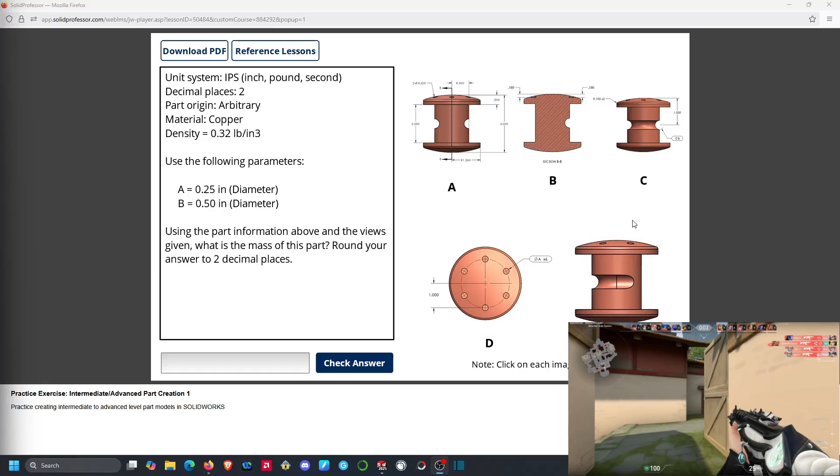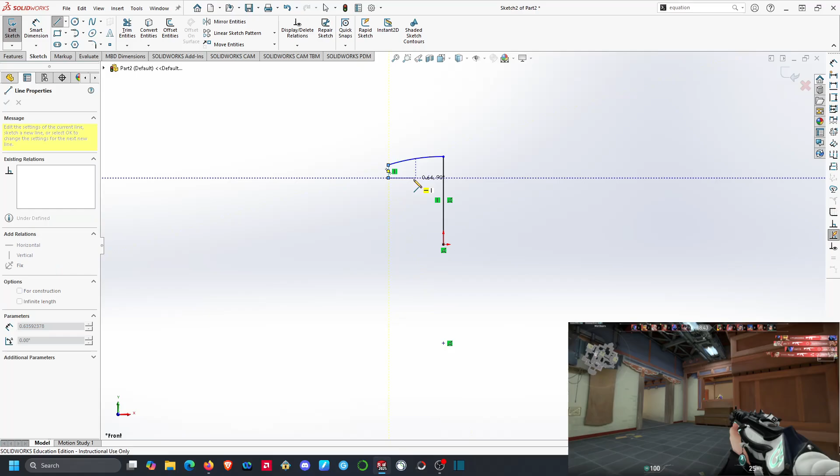Before you do anything, make sure you're in IPS units because that's what it requests, at least for mine. We're going to start by making a sketch, which I already have selected, and select our line tool. We'll make a vertical line, then a tangent arc like this, then a vertical line down, then a line like this, making sure it's horizontal with that. Then we'll make a center line right here, and start dimensioning.

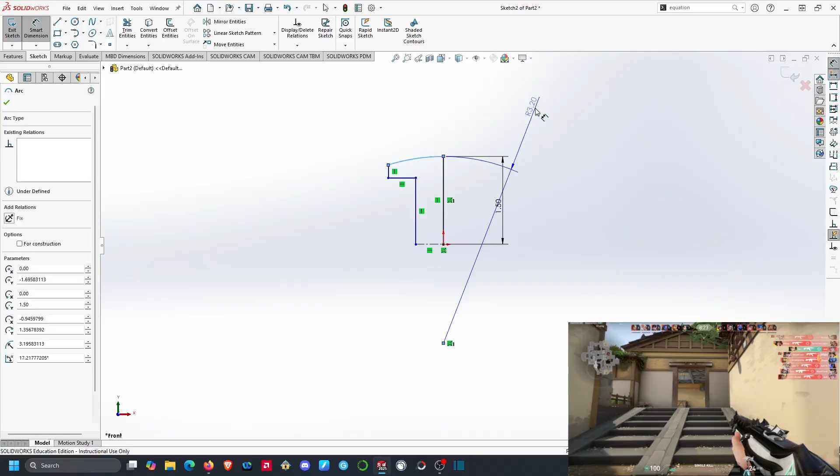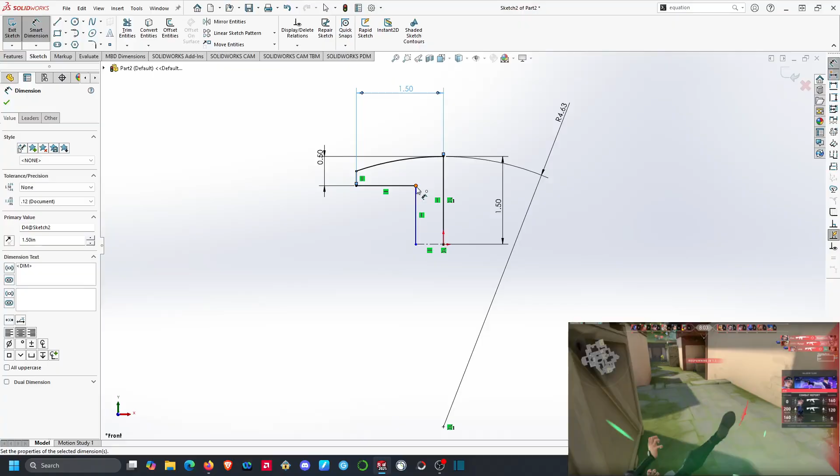This needs to be 1.5 inches long. Before we make a fillet, we're going to set this to 4.625 inches, and it'll make that. Then from this point to this point, this needs to be 0.5. From this point to this point, this needs to be 1.5. Then from this point to this point, this needs to be 0.9.

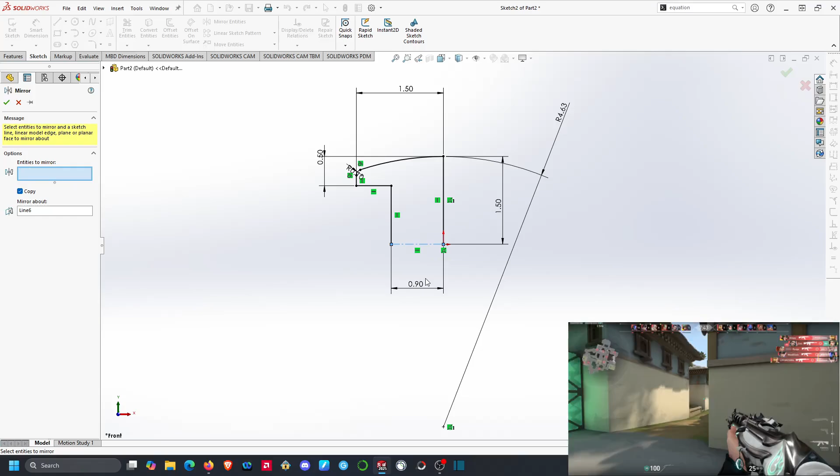And we'll add a fillet right here, making sure it's 0.1 inch. We have a defined sketch, but what we need to do is mirror it. We're going to mirror about this center line, so we'll hit Control+A on our keyboard to select everything, and mirror it. All right, and this is the sketch we have to work with right here.

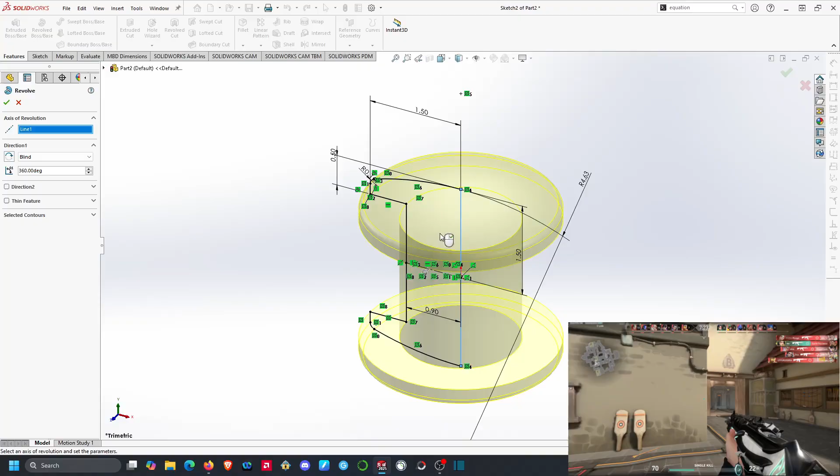What we do next is go to Features, and go to Revolved Boss/Base. We're going to revolve it around this line, and this is going to give us our shape, and we'll hit Yes.

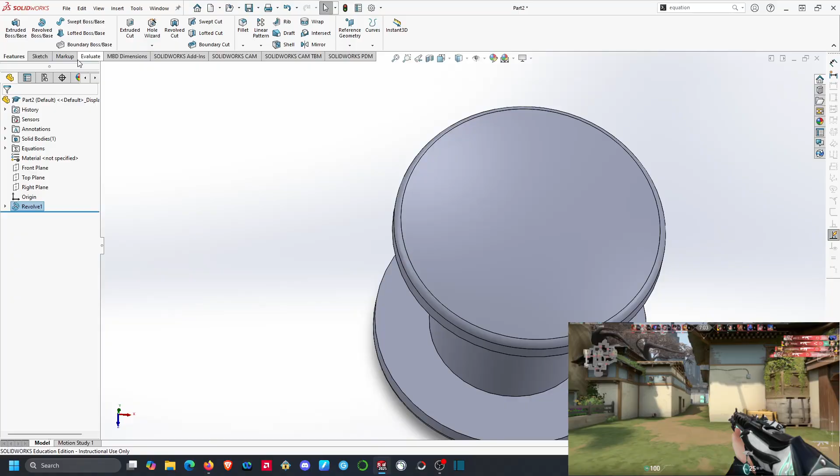Once we have our shape, we're going to go to the top. Before that, we want to make reference geometry - a plane on the top for our two references. We'll choose this top face here, face 1, and this face under here, face 2. That's going to make a plane, and then we can make a sketch on that plane.

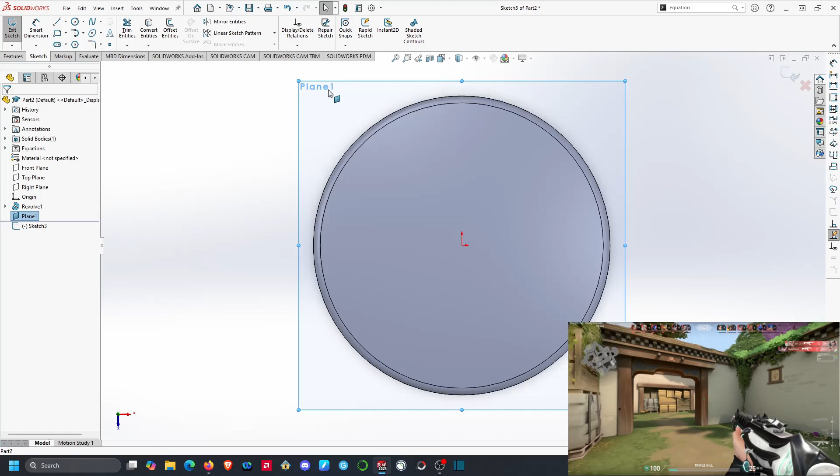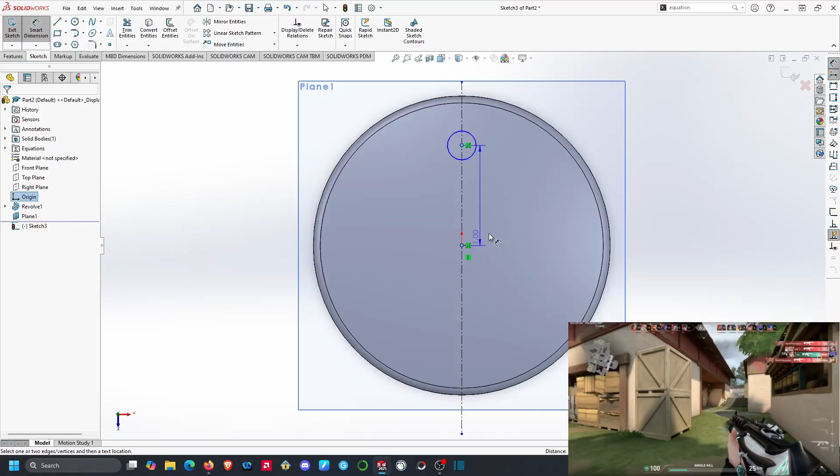For the sketch, we'll make a center line down the middle, and take a circle and put it right here. Using the Smart Dimension tool, from here to the origin this needs to be 1 inch, and the circle needs to have a diameter of 0.25, or that's our A value - let's do equals, yeah that's our A. So we choose our A, and you see this is fully defined.

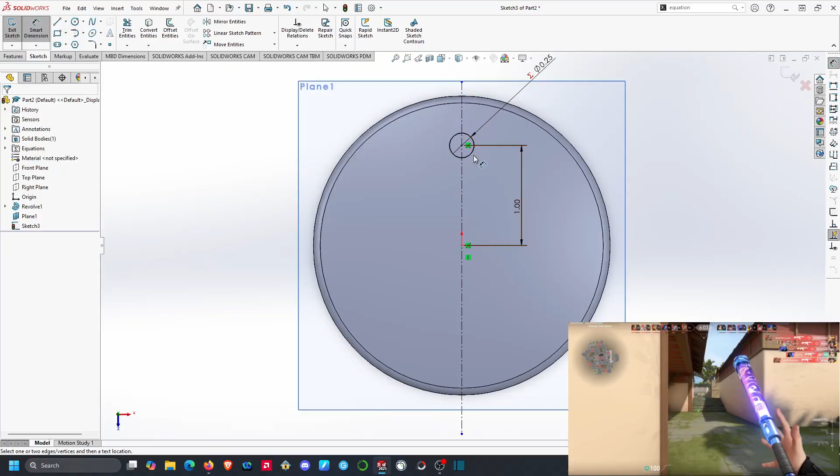To make the pattern, we go up here where it says linear sketch pattern, click the arrow, see circular sketch pattern, and click on this. See how it makes our circular sketch? We need 6 of the circles, so we'll hit 6 right here and fill that in. Click yes - this gives us our circular sketch.

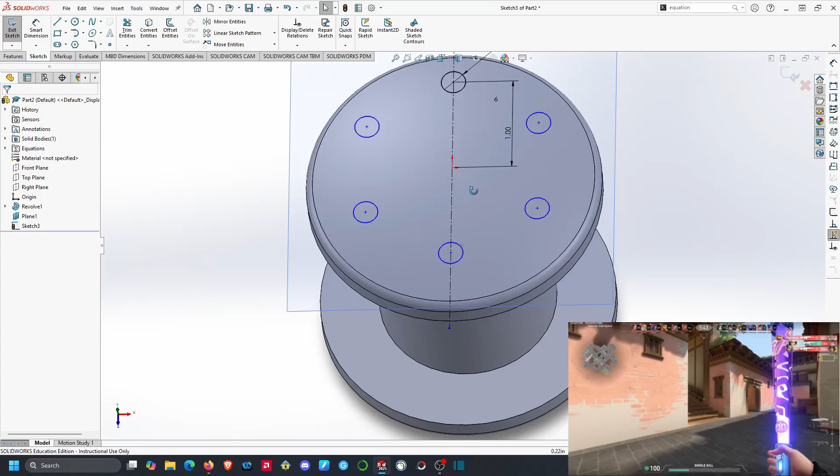Then we go Features, Extruded Cut. Click on this, and set it to 0.18 inches - that'll cut 0.18 inches down. Boom, look at that, perfect.

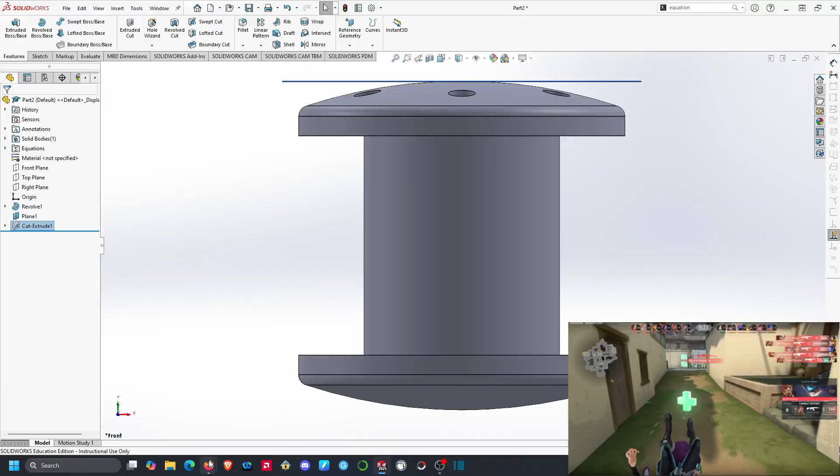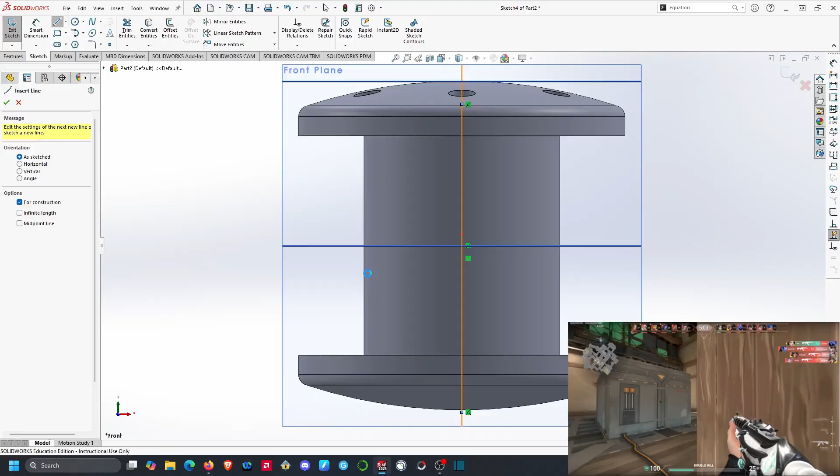Then we're going to create the little cut thing - if we look here, we're going to create this thing right there. So we go to the front plane, then sketch on the front plane. We need to get a center line, draw a center line down the right plane, then draw another center line down here, just to help me out - you really don't need this. Then we're going to put a circle where the midpoint is on that line.

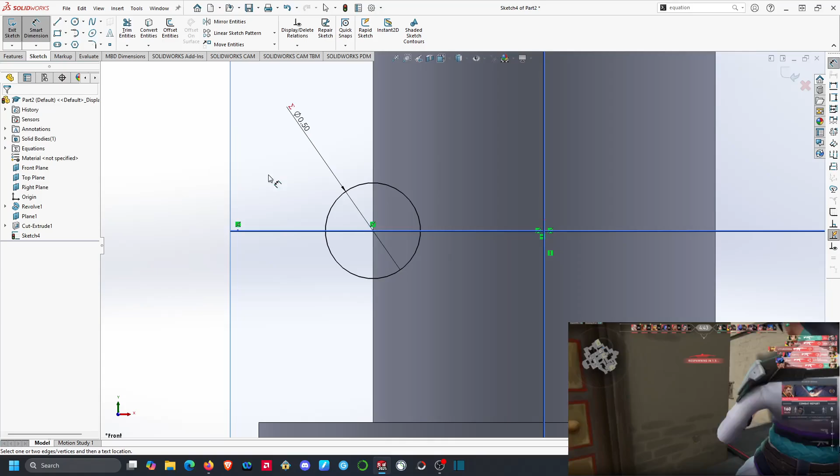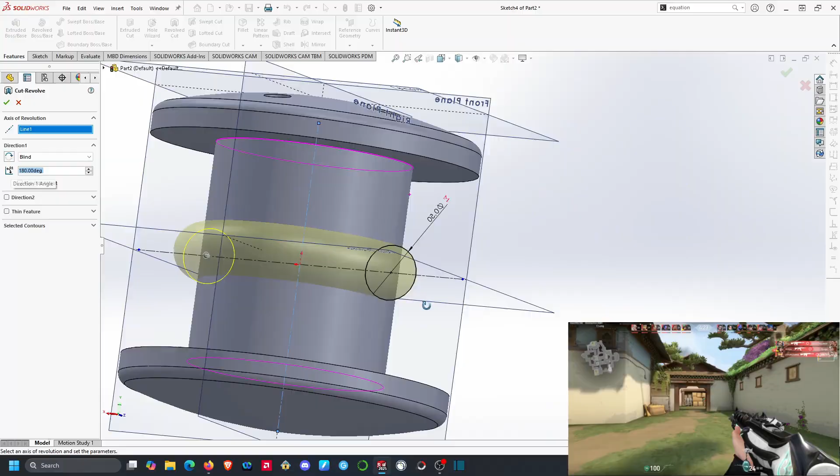We'll put it there, and this circle is going to be set equal to our B - right there. Boom. Once you have that, we're going to do a revolved cut. So we go here, revolved cut, and select this. Our axis of revolution, we want to revolve it around the line that's running down the center of the object. We're going to do 180 degrees like this, and cut it.

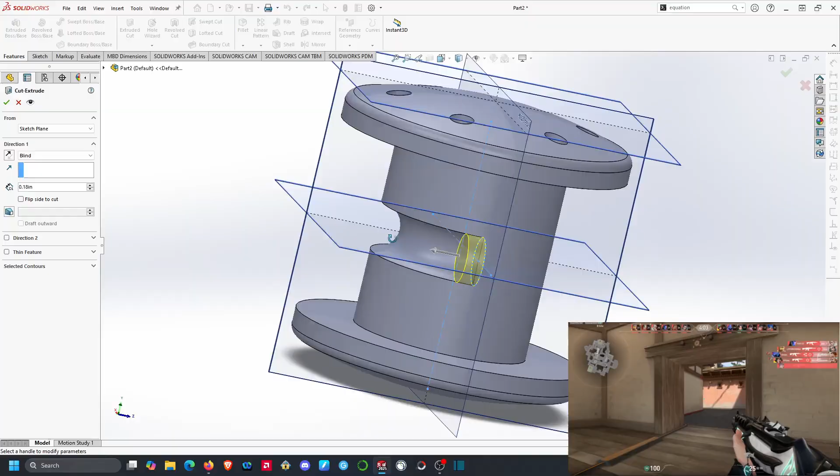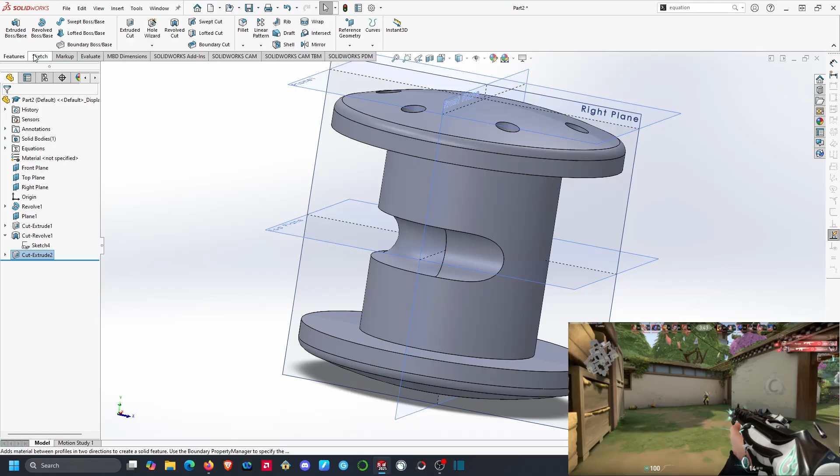Then we're going to use the mirror feature. We do mirror, and we want to mirror the extruded cut along the front plane - or excuse me, the right plane. And we're going to mirror that. Look at that, we have the part.

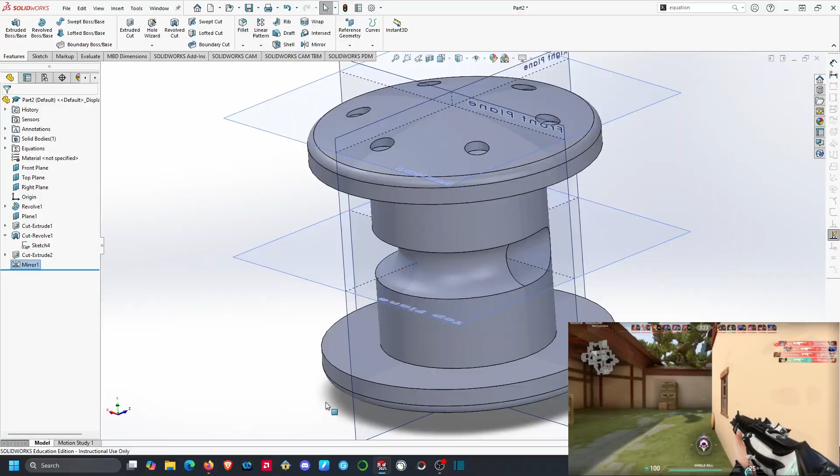If we edit the material, we do copper, because that's what it wants, and we apply it and exit. If we go to evaluate, we go to mass properties, you see how it says 3.23 pounds. We go to this, we do 3.23. Boom, that's right.